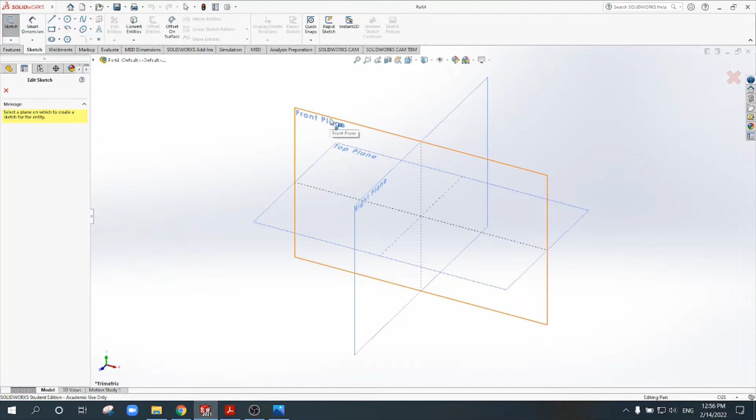Now, the height of this shape is 30, the diameter of the big circle is 30, the radius of the small circle is 7.5, and I know that this line is 18. So when I open the software, double click, sketch, not front plane, this time top plane, and I'll start by making the circle, which has a diameter of 30 as given.

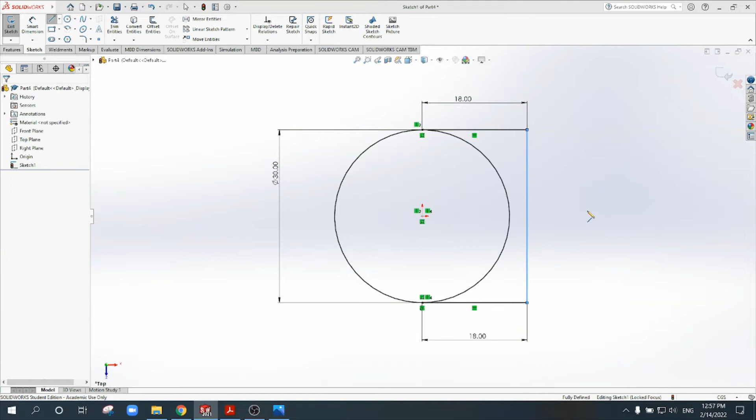Now I have two lines. This line is extended horizontally until 18, and a second line extended horizontally also as 18. So I have to put the dimension. These two lines are connected. Now, if I want to trim the circle, I will have this segment, and remember the circle in the center with a diameter of 15.

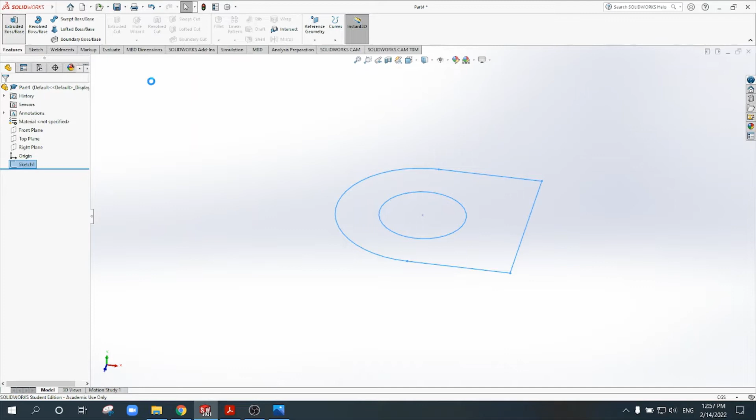Now, if I finish the sketch, I can extrude features, this part, a distance of 30. So this is segment number 1. Now, the second segment can be drawn from the bottom plane, new sketch, and I can look at the top view to make it easy to imagine the shape.

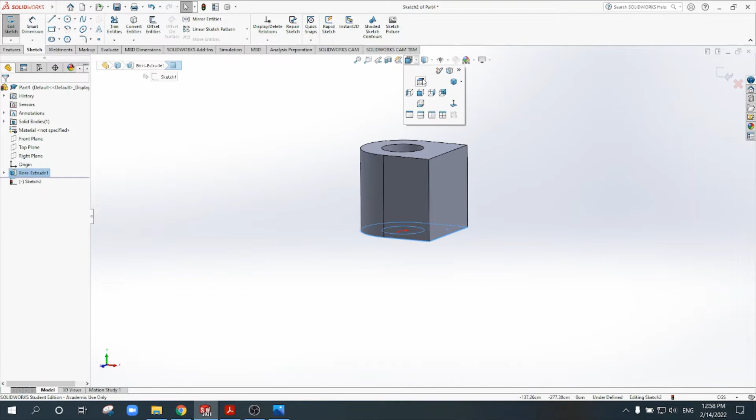So from this point, I can create the rectangle with random dimensions, and then I will be able to determine this is 30 because it is tangent to the circle. They have the same size, and the length was given to be 60 from the center of the circle until the last edge. So this distance between circle and line is 60.

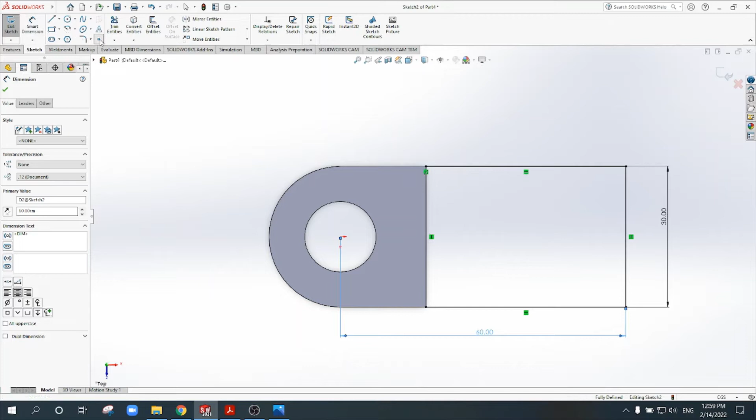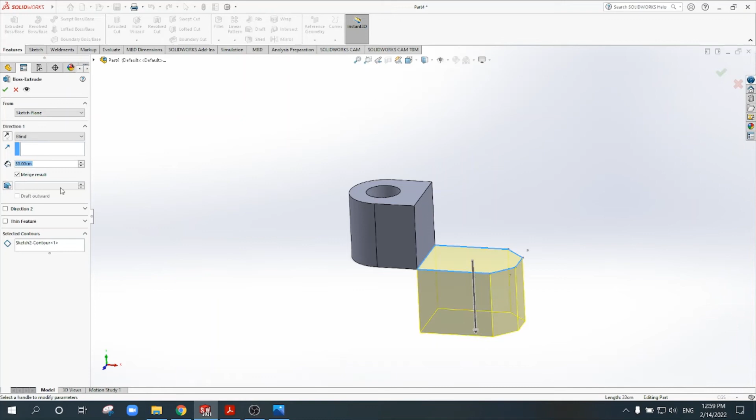I have the chamfer in the corners. I have to save 9 and 9 spaces. So I'll bring the chamfer command with a distance of 9. So that point and this point, and that's it. Now if I finish the sketch, I can extrude this shape not down, it should be up, and not the full height. It should be exactly 9 as given.

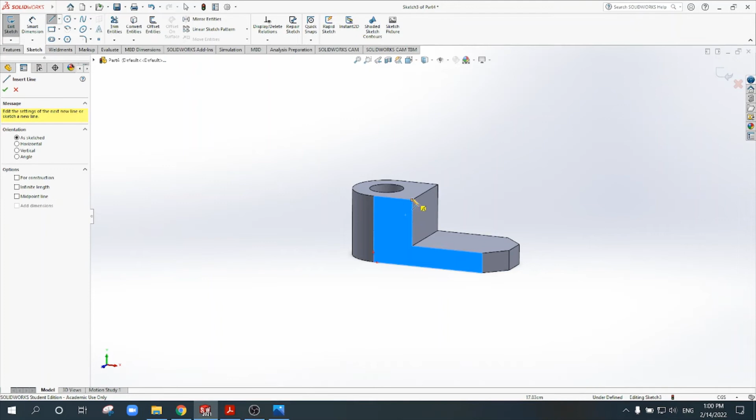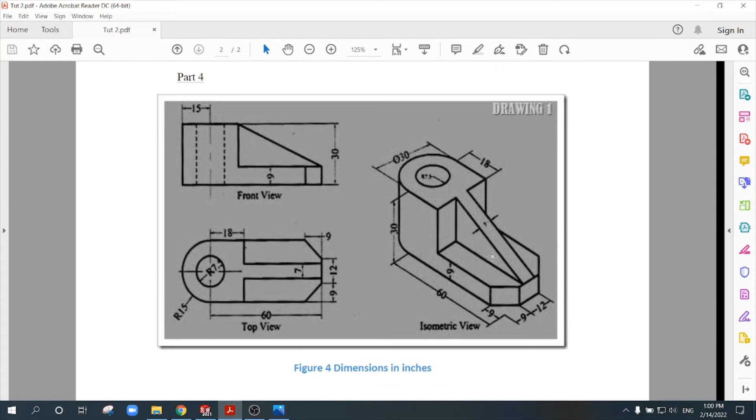So we are done now with segment 1 and segment 2. I'm left only with the triangle. Now the triangle, I have a small issue. If I select this plane, for example, and I make the rectangle, when I extrude, I will get the full shape filled with the rectangle like this. But what I want is a small segment of the rectangle in the middle of this shape. So I cannot start from this plane. So that sketch is wrong.

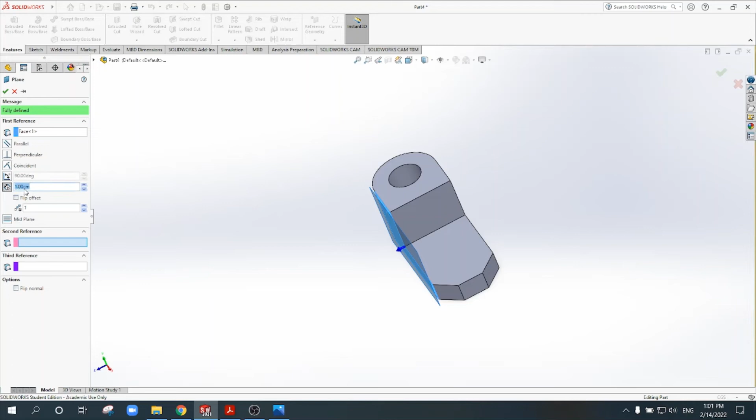What I have to do is go to reference geometry and select plane. I'm making a new plane parallel to this surface at a distance of 15. Why? Because it's half of the shape, but not in this direction, flip offset. So that is a new plane created in the center of the shape, and I'm done. With this plane, I can click and sketch. So I'm sketching on this plane.

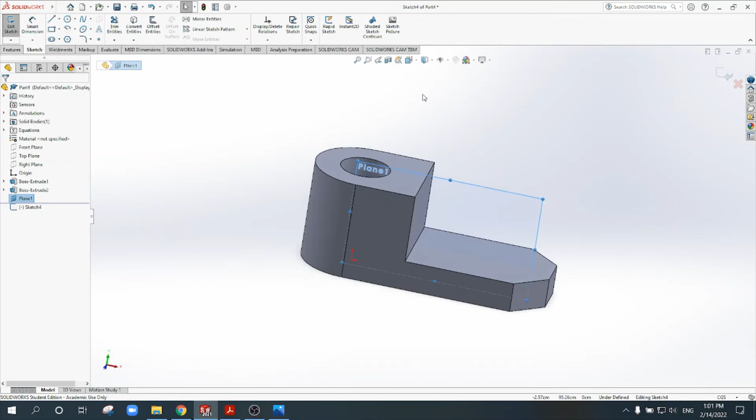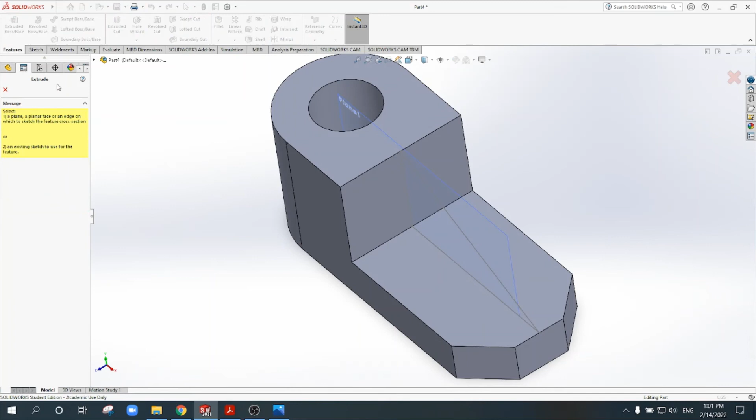If I look at the front view, I can make a triangle, and you can see that it's fully defined because it's based on the previous parts. And now I can extrude this triangle. Now if I go to features, it gives me this option. Is it to the left or to the right? I can say in both directions. So in direction 1, I have a specific length, and direction 2, I have a specific length.

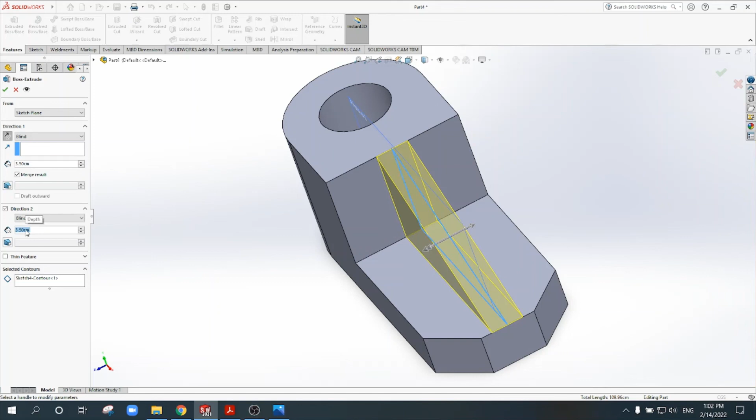If I go and check, this is 7, so 3.5 each. So I have to set 3.5 in direction 1 and 3.5 in direction 2. And done. Now I don't need to see that plane, so I can hide that plane, and this is my final drawing.